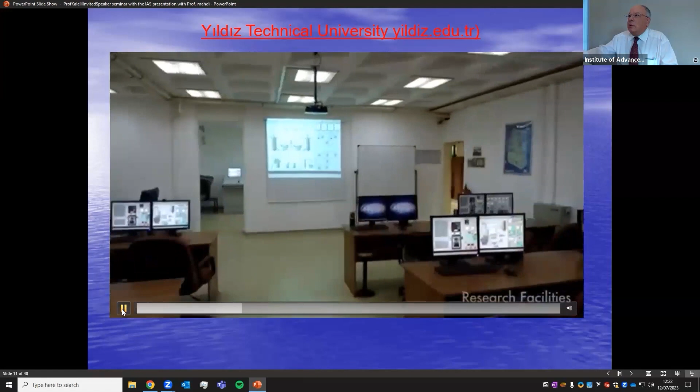I just want to tell you some small things. I think I heard that Loughborough University's campus is the biggest campus in Europe, isn't it? It's unbelievable, it's very nice. But I think, as well as a broad variety of cultural and artistic occasions, this gives students the opportunity to lead an active academic life.

Being one of the most well-known universities in Turkey, it is conducive to the achievement of the goal of development and welfare of society. Yildiz Technical University, one of our leading government institutions, is situated on 2 campuses in Istanbul. It is the 3rd oldest university in Turkey, with its history dating back.

So every year, the professors, all teachers, if they do high quality papers like Q1, Q2 in Scopus, our rector gives us an award, a certificate, and also they give some money for remuneration. It was 2 months ago, I got one.

To 1911. Today, Yildiz Technical University has 11 faculties, most of which are related to engineering, 2 graduate schools, 3 vocational schools, 1 school of foreign languages, and more than 34,000 students.

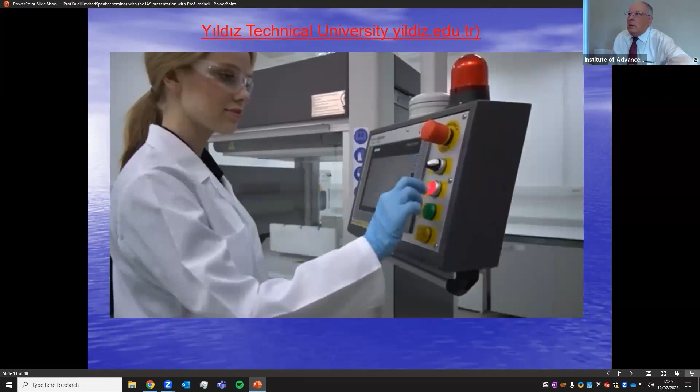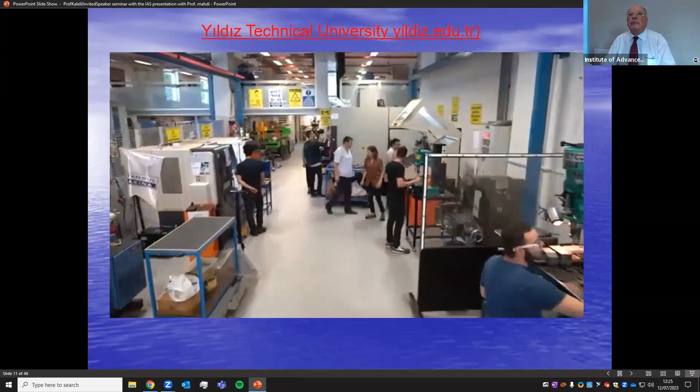Activities in our country, Yildiz Technical University commenced operations in certain technological development areas and founded Yildiz Technopark in 2003. Yildiz Technopark hosts more than 7,500 research and development companies in many sectors, such as software, information and communication technologies, electronics, the pharmaceutical industry, the machine and equipment industry, chemistry, the aviation industry, the defense industry, civil work, and the food industry.

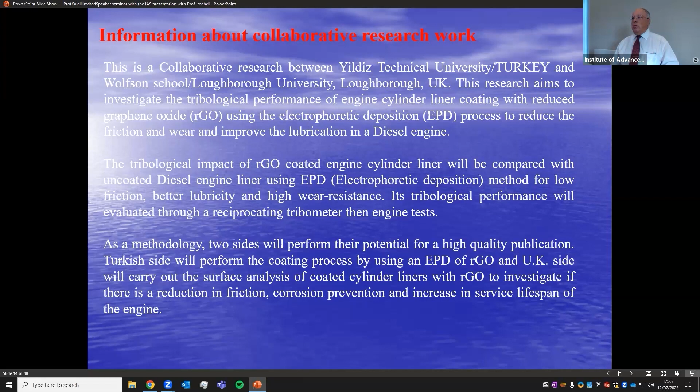As a methodology, two sides will perform their potential for high quality publication - for a good collaboration, we need to publish high quality papers. The Turkish side will perform the coating process using EPD of RGO, and also I can add multi-walled carbon nanotubes. The UK side will carry out surface analysis of coated cylinder liners with RGO to investigate if there is a reduction in friction, corrosion prevention, and increase in service lifespan of this engine.

The importance of this collaborative research work, so you know.

We have 100% of energy, and only we obtain 40% as indicated work. And 25% of this indicated work is mechanical losses. So what happens? 10% of mechanical losses, we obtain mechanical in 10% of the total energy.

According to Dr. Lang, as you see in the paper here, the friction losses comprise 72.5% of the mechanical losses. What you see here are connecting rod bearings, main bearings, pistons, valve train. The most wear mechanism occurs at top dead center, between when the piston and cylinder liner rub together.

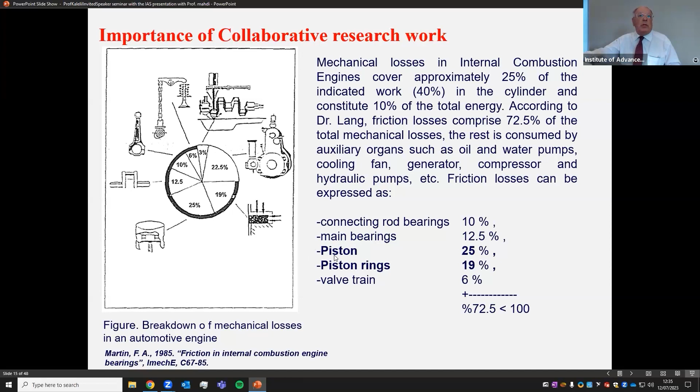You see the piston friction is 25 and piston rings is 19, so it's almost 45-50% of friction losses happening there. According to my experience, most of it happens at the top dead center of the engine.

So the importance, in terms of total energy saving in internal combustion engines, a 10% reduction in friction losses is estimated to give fuel economy between 1 and 3%. But the importance here comes from powerful collaboration. If we can coat with RGO or multi-walled carbon nanotubes as the second option, then we can collaborate.

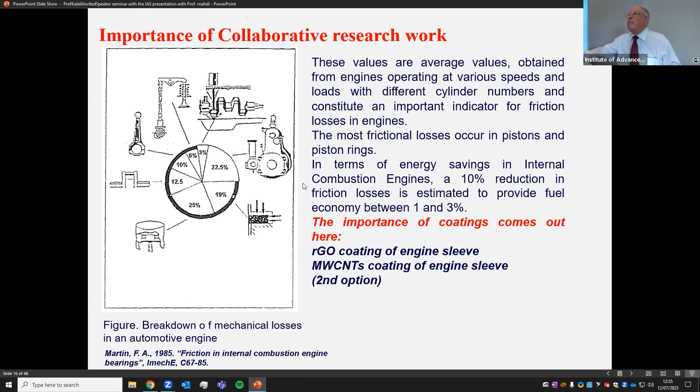In our lab, we have a single cylinder diesel engine, the 6LD400, and you see the engine specification here. It is produced by Anadolu Motor Group, a big company in Turkey, and we have this engine.

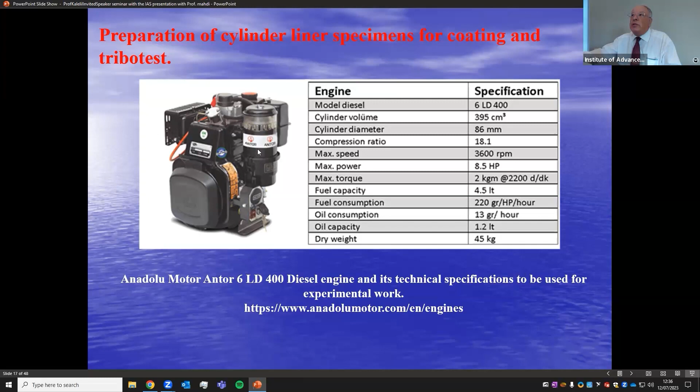So why EPD coating? Why electrophoretic deposition? Because you apply energy voltage, and the coating can be done between 1 and 5 minutes, or 10 minutes for multiple coatings. It provides a homogeneous coating surface. By extending the time, the coating thickness can be variable, and it's low cost.

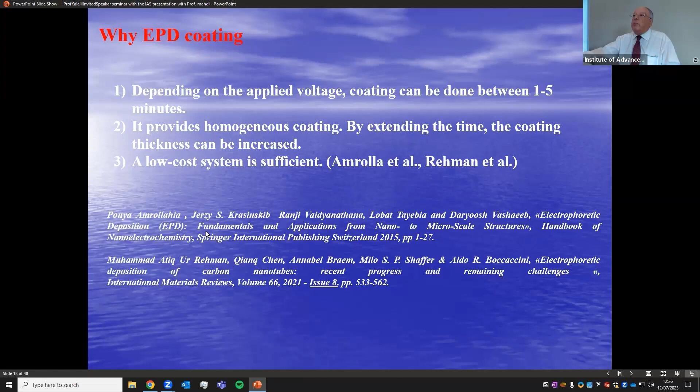This belongs to the Anadolu Engine Group in Turkey, in Istanbul. So it's a dry cylinder liner, you can change the liner, so we can have spare parts. And what we did, for tribo test,

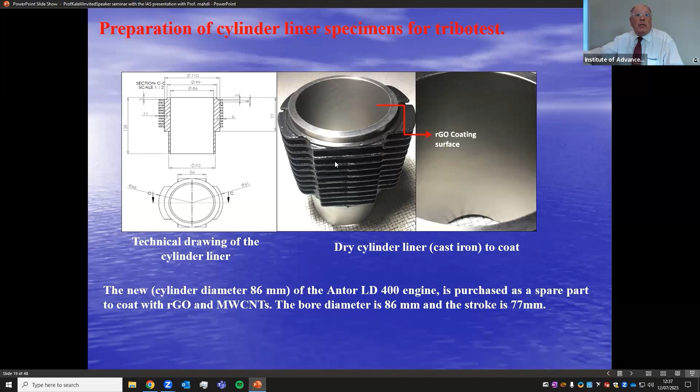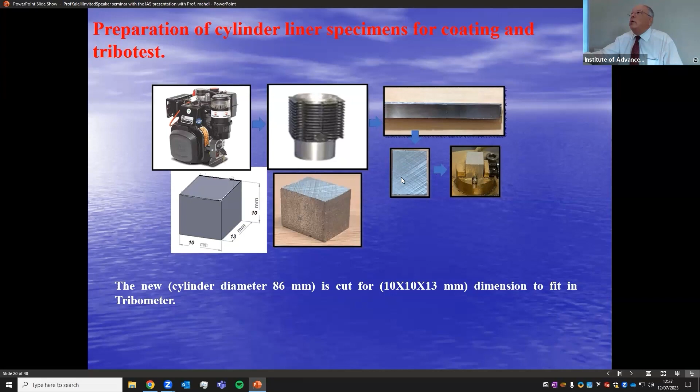We cut it without damaging the rubbing surface, the honed surface. We cut a 10x10x13 millimeter dimension to fit in the tribometer here. This is the cylinder liner surface.

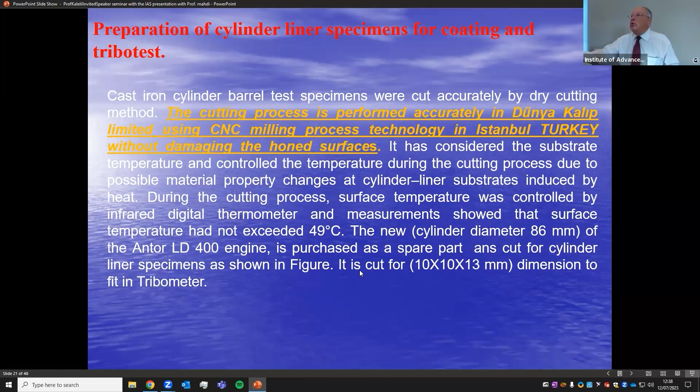For the cutting process, we collaborated with industry. I have a good collaboration with Dünya Limited in Turkey, and they used CNC milling process technology without damaging the honed surface. They measured the temperature not exceeding 49 degrees Celsius, and they cut it in a dry cutting process. They cut very well, 10x10x13 millimeter dimension, and it fits well in our tribometer.

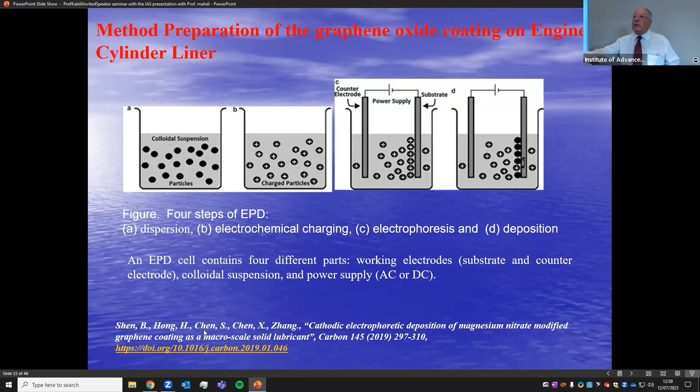For the process, we have 4 steps: dispersion, electrochemical charging - as you know, electrophoresis - and deposition. So we use this recipe from the literature here, from this paper.

So we have RGO powder, and we have isopropanol. We mix isopropanol with RGO powder. Then we add the magnesium nitrate, and we have the EPD process. Then we coat the engine cylinder liner here - I will show you later.

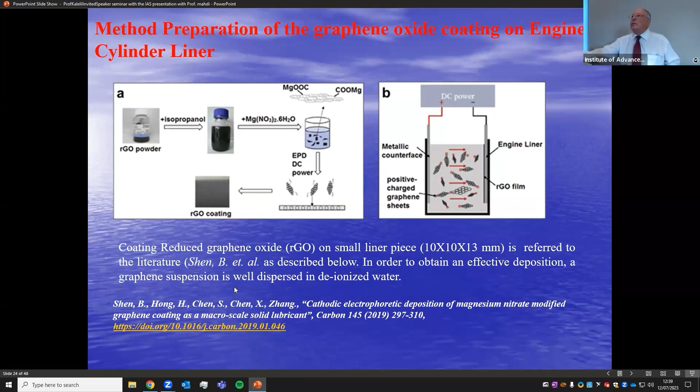First of all, we prepare graphene with isopropanol solution. The duration of magnetic hot plate stirring and ultrasonic cleaning is 1 hour, 30 minutes, 30 minutes. It should be well dispersed, well in colloidal form.

Total 30 minutes. And also, then after we add the magnesium nitrate - we know the amounts according to the recipe from literature survey - and the mixture of graphene isopropanol is mixed with magnesium nitrate here, still on the magnetic hot plate, also in the ultrasonic cleaner. So stirrer and ultrasonic cleaner with magnetic stirrer.

The thing is, the solution here is getting hot. If it gets hot, you cannot proceed with the EPD process. That's why we use ice to keep the solution cold. That is very important.

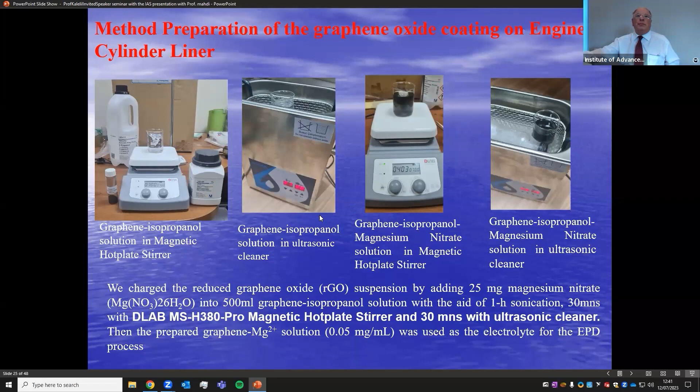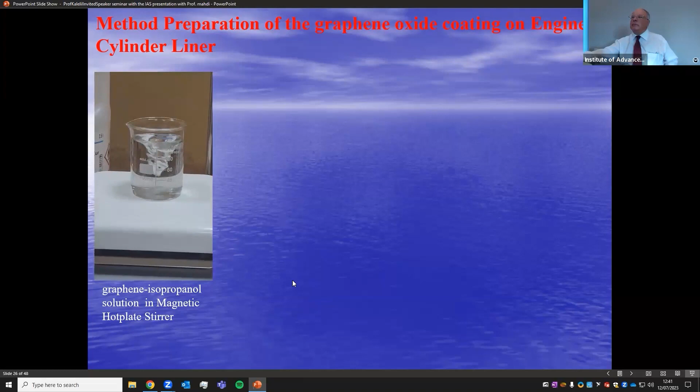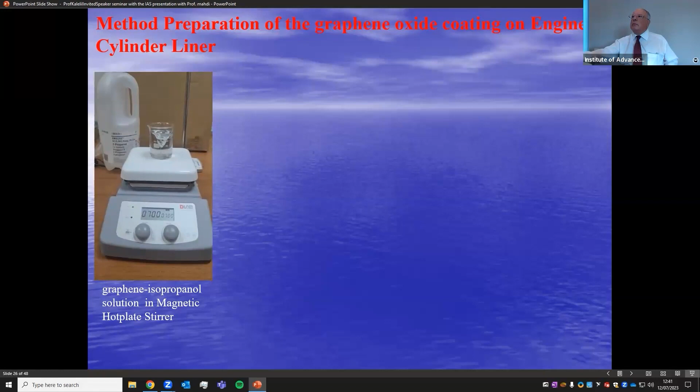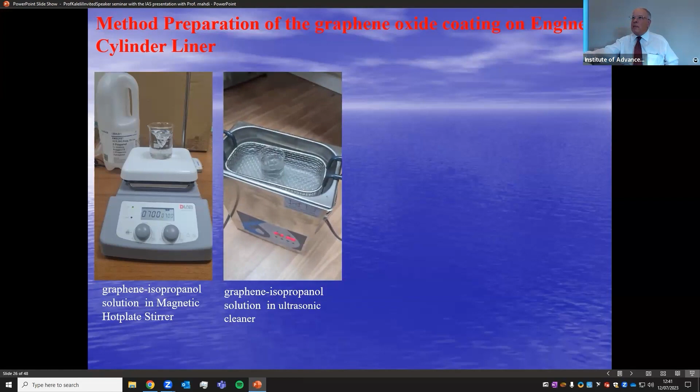Then ultrasonic cleaner. Magnetic stirrer and ultrasonic cleaner is very important. If you don't do it, you cannot succeed. It's very difficult.

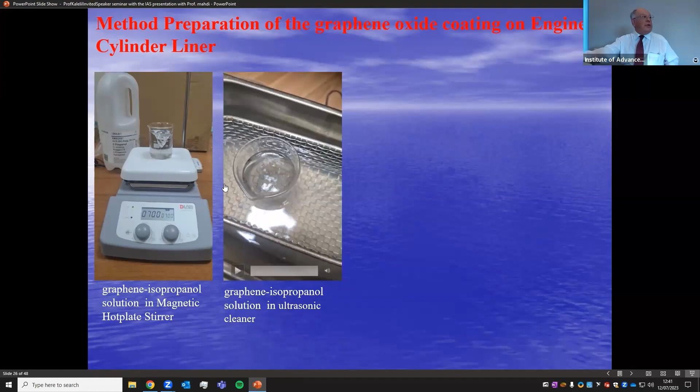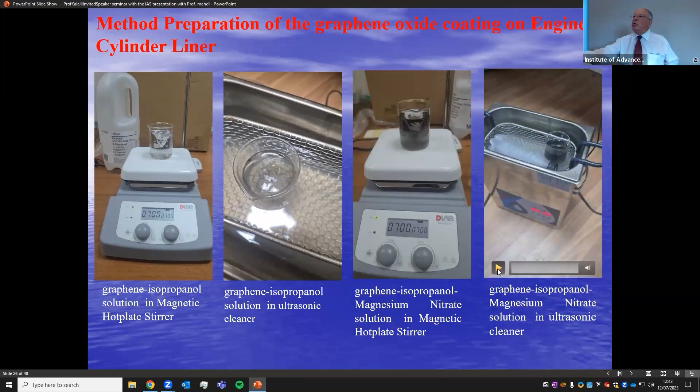Then we added, according to the literature survey, magnesium nitrate, enough amount. You see the color starts to change. Then magnetic stirrer 30 minutes again. So this total is 1 hour, so 2 hours.

So we need ice here. It's getting hot.

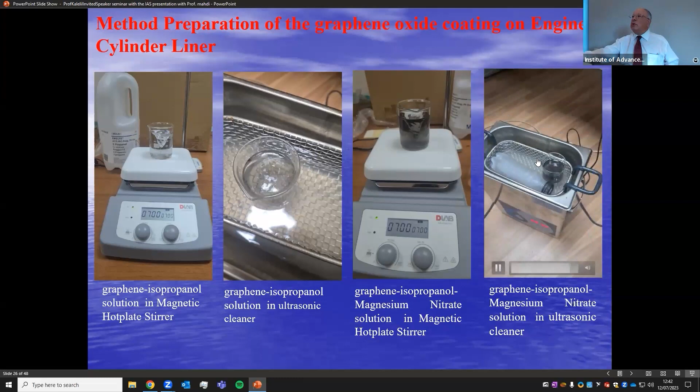For this process, you can have power supply. There are different kinds of power supply, like for example 30 volts, 40 volts, and it is not enough. Because the metal we use is cast iron of the engine liner, and 30 volts is not enough. So we had to buy a Consort EV from Belgium, which can go up to 1,200 volts.

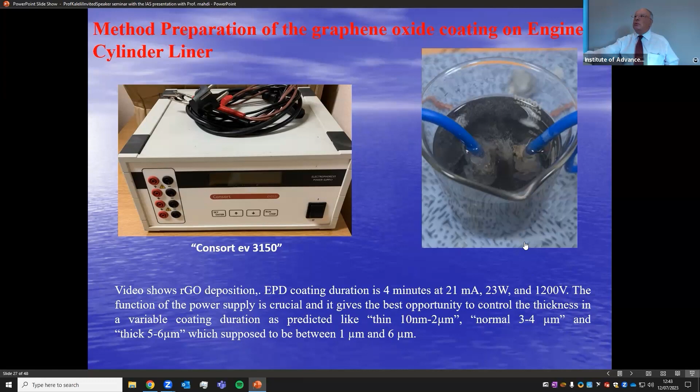Some voltage in our lab was variable. So for example, in this process we used 4 minutes, 21 milliampere, 23 watt, and 1,200 volts. So you can see here.

You see the coating process, and to be able to coat, we just isolated the pieces of lining. If you see bubbles at 1,200 volts, then you understand you will be successful.

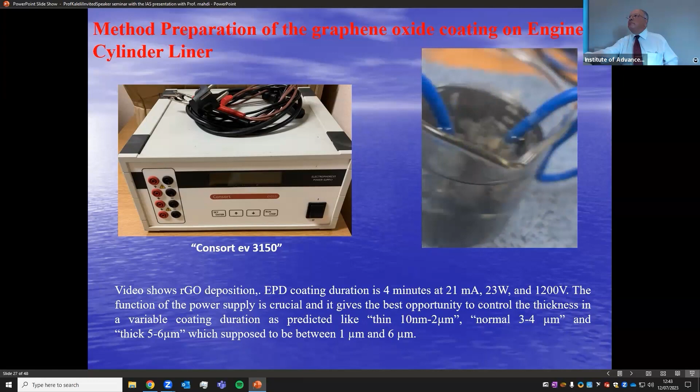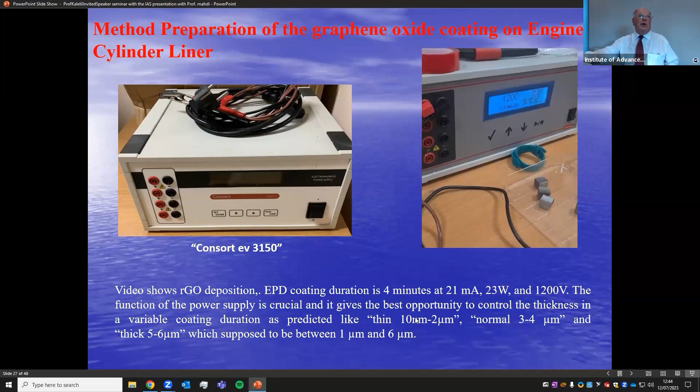Just let me show you, we coated some, but we will continue our collaboration to obtain, for example, different thicknesses from nanometer to micrometer. It can go up to 6 micrometers.

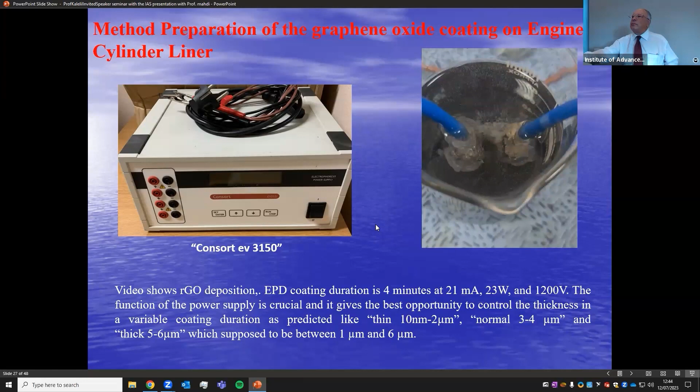You see, 1,200 volts. Different thicknesses, different shapes.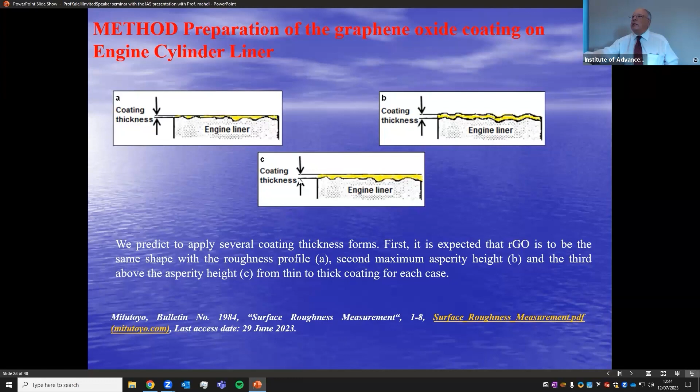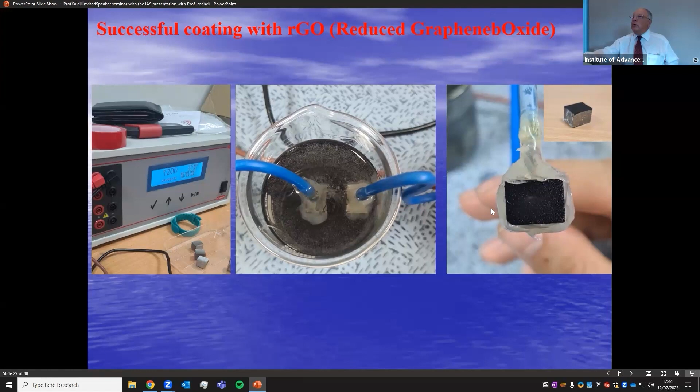And so at the end, we obtained reduced graphene oxide coating on the engine liner. You take off the isolation of silicone, and you can test it on the tribometer.

Well, here you see the coating of 3 minutes, 4 minutes. And we have also 6 minutes and 2 minutes. We have more.

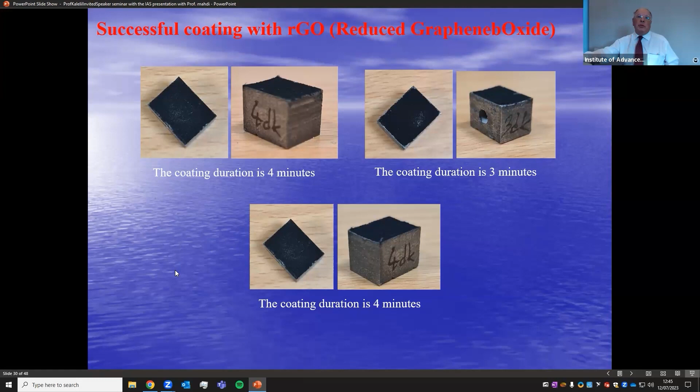So my tribometer is a custom-made tribometer. It's very sophisticated. It can have 800 data points per second.

The heating goes up to, here we use the procedure, 99 degrees Celsius with 30 Newton and 21 minutes. Why 21 minutes?

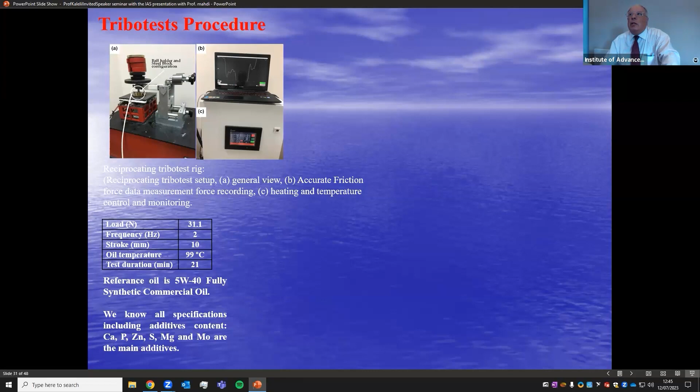Because when I speak French, I have been in France, Lyon, at INSA many years ago, and I worked with Mr. Yves Berthier at INSA Institute. As I speak French, we collaborated together, and we tested on the tribometer at INSA.

These parameters. Why these parameters? Because we like to obtain additive layers, just covering all the surface on the liner or on the sample we are working with. That's why I use this procedure for this type of lubrication condition.

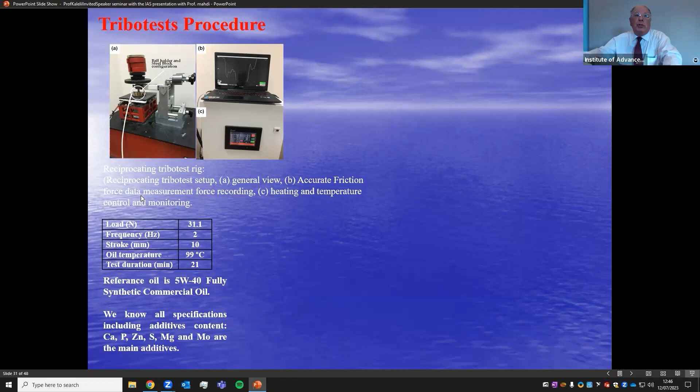And if you exceed more than 21 minutes, 30 minutes, the friction becomes steady. So we stop there to see what happens on the surface.

We used mostly, we had used real piston rings on the liner before, but it doesn't work because of the holder. We cut small pieces of the piston rings, and if you set it up with 1 micron or 2 microns, the results are all different, and also the shape of the piston rings varies, there are different types.

They are changing. So we produced a specially made ball holder and ball with 8 millimeters. Just to obtain a contact point, and in that tribometer we tested different kinds of lubricants, nano lubricants, nano additives, etc.

That's why we use a ball on block system. And you see the cylinder liner here, 10 and 13 millimeters, as we cut it in the industry.

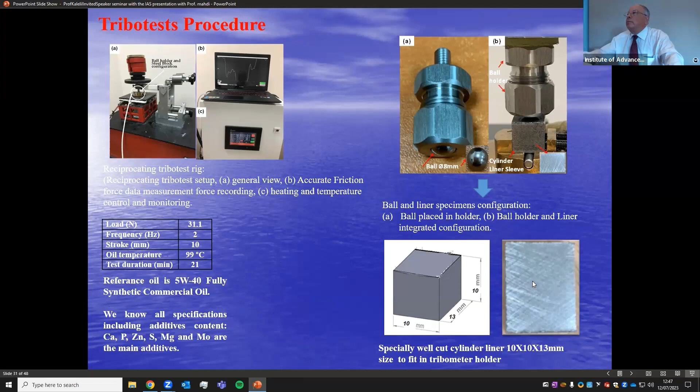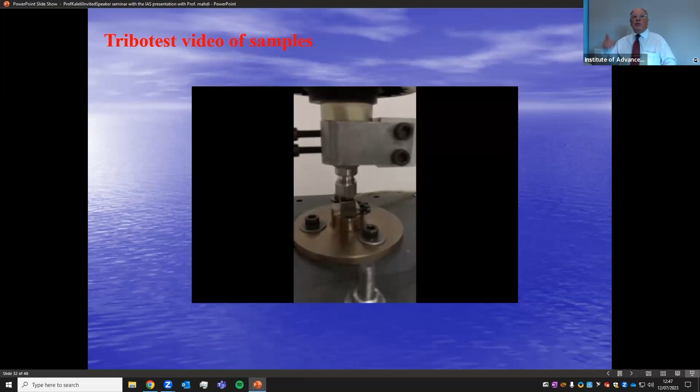But I will show you just a small example of my tribometer. It's very sophisticated, and we did the program also.

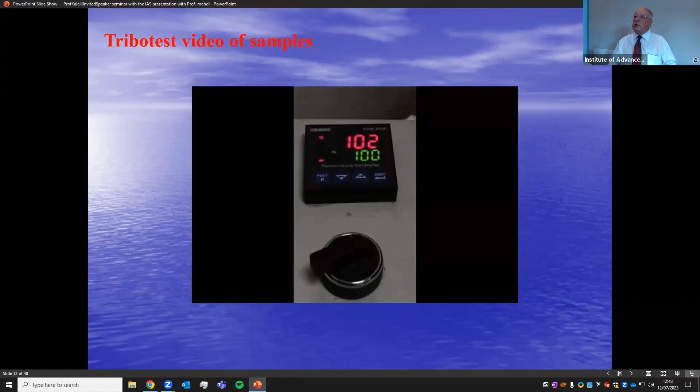The temperature is 100 degrees Celsius, and you will see the signals going up and down, so you know, reciprocating, and we obtain 800 data points per second. And in that case, 640, because the stroke is 8 millimeters.

So next step, this was for reduced graphene oxide. Now also we tried, surprisingly, this is also a PhD thesis of my student. He's working very hard, he is good. We tried also with multiwall carbon nanotubes.

Just before coming here a month ago, we started almost 2 months ago. So we bought multiwall carbon nanotubes from Arkema, and you see the specification. But for this the solution is different.

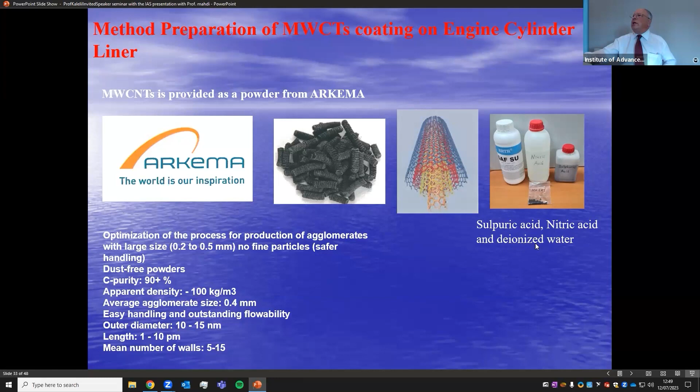We found the recipe, the article, and we need sulfuric acid, nitric acid, and deionized water. Then you can do coating with those. So the preparation is just first of all mixing the nitric acid, sulfuric acid mixture.

Then adding carbon into that mixture, and stirring with a magnetic stirrer at 130 degrees Celsius for 30 minutes. So you obtain one solution. Then after, you add very small drops of this solution into deionized water. Then you can do the EPD process.

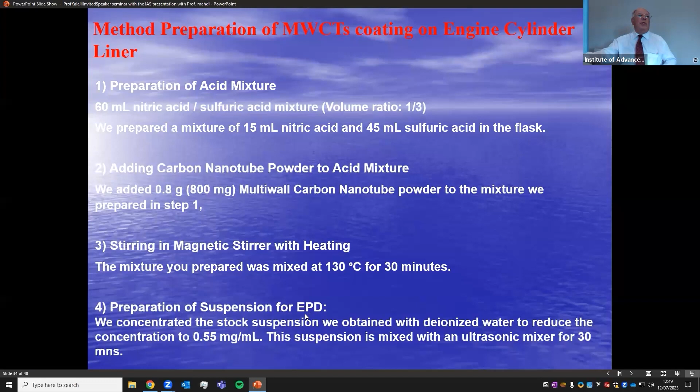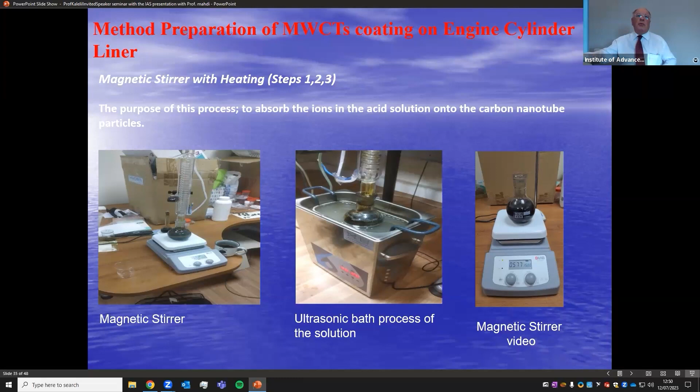So you see, this is a magnetic stirrer, and after the ultrasonic bath process, we use the magnetic stirrer. This is the first solution with sulfuric acid, nitric acid, and multiwall carbon. So you obtain this heavy solution.

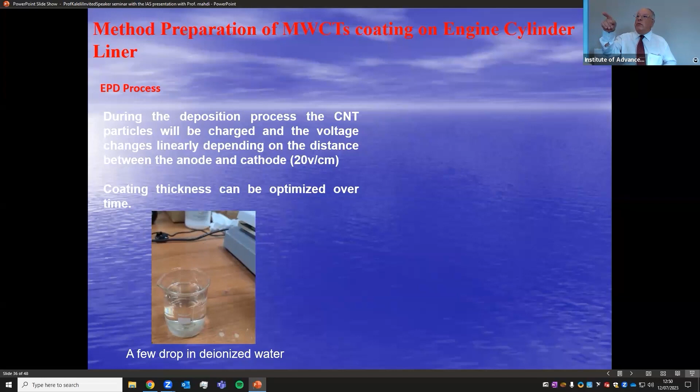You must use a few drops of this solution in deionized water, but we only use one drop here. If you increase the drops, it doesn't work. So after many experiments, we have succeeded.

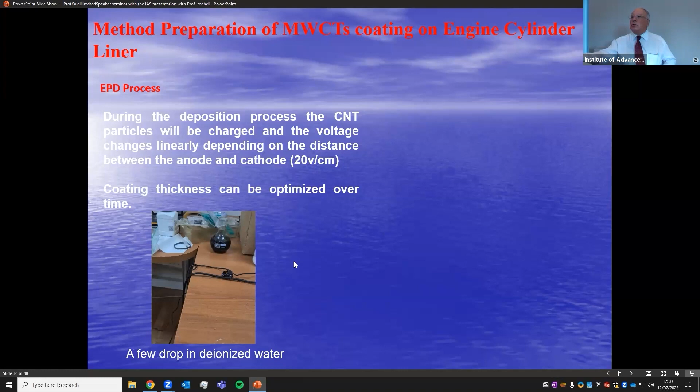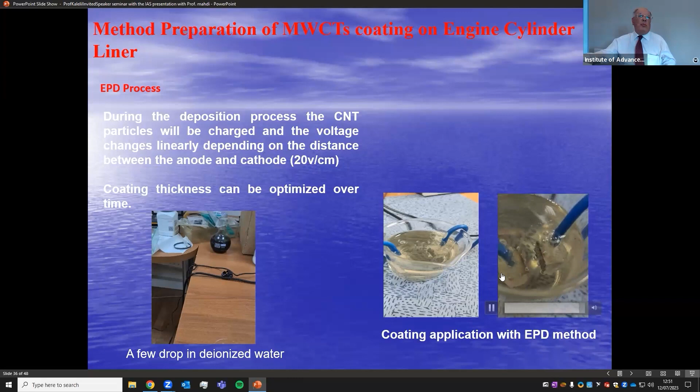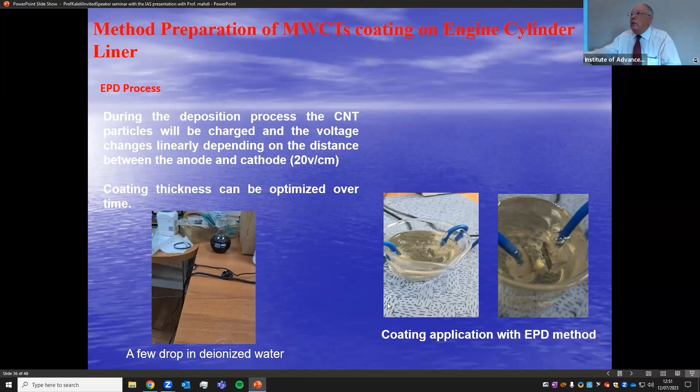The voltage at that time is 40 volts, and the distance is 1 or 2 centimeters, no more. For example, if we tried 3 centimeters, it didn't work. We did many tests and spent a lot of samples. We lost some, but we obtained results.

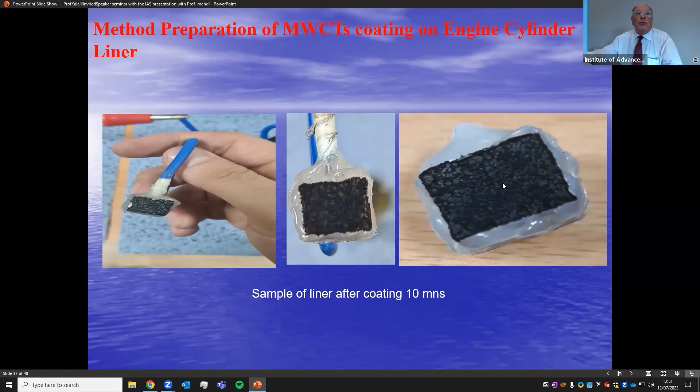So you see the multiwall carbon nanotube coated surface. Then it's ready for the tribometer. Just before coming here, we did

some tribo test results. In my tribometer, we have a very nice program. As it is reciprocating, it takes the average of all data. We have millions of data points here, as in 1 second is 800 data points. And it gives us the average of the COF and also the shape.

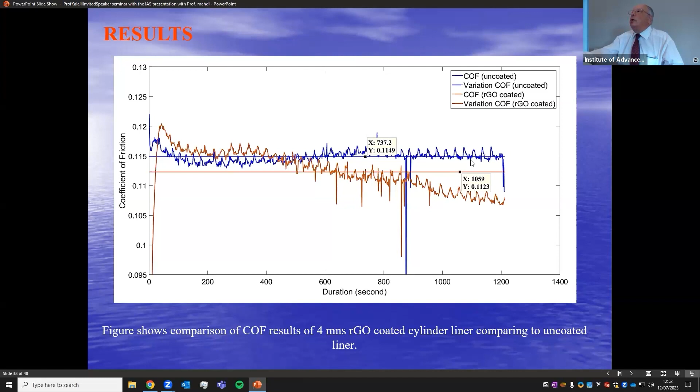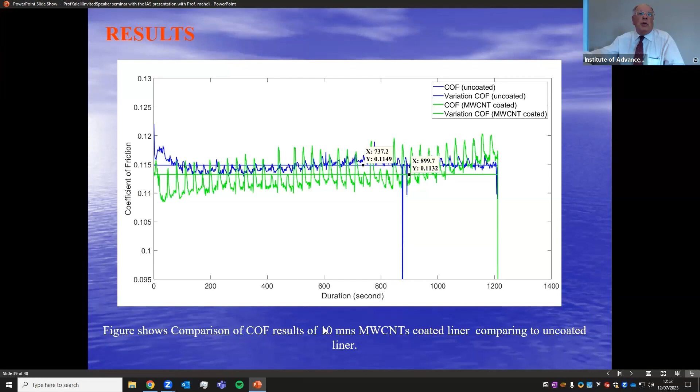You see here the red one is RGO and the other one is uncoated. And here you see the multiwall carbon nanotube sample also, and multiwall carbon nanotube was less than the uncoated one. But the multiple coating took 10 minutes, 9 to 10 minutes. It was not 3 or 4 minutes - you cannot succeed in that time.

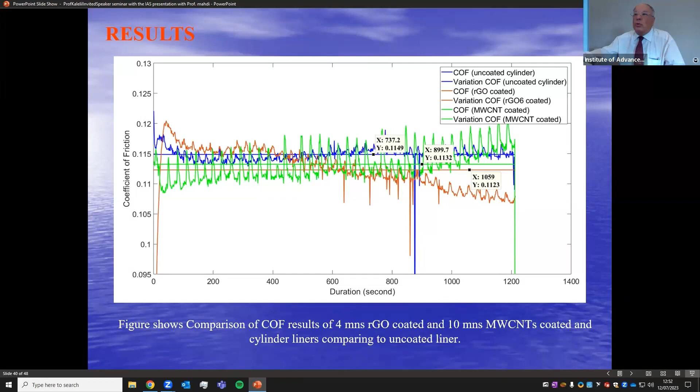So this is uncoated, multiple coated, and RGO coated. As a coefficient of friction, you see the result here. So uncoated was this one, and it improves up to RGO. So RGO is much better than multiple coated.

So the COF is decreased by 2.26% for RGO and 1.47% for multiwall carbon. The error data is 0.1, not 1 - 0.1%. So almost 1 by 1,000.

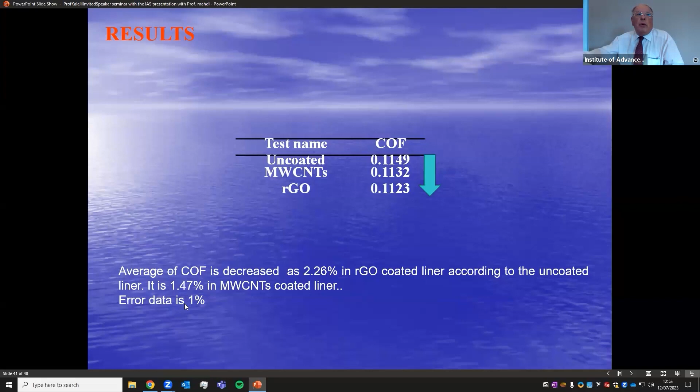Next step will be engine test, if we can collaborate, I hope. For the engine test, we designed a special device just to install the cylinder liner, cylinder sleeve in that procedure, and we obtained it. We did.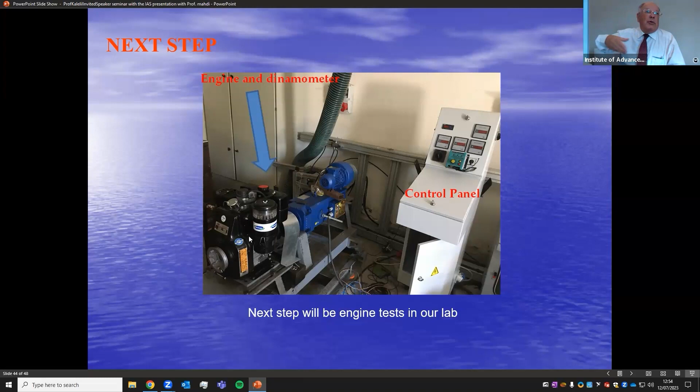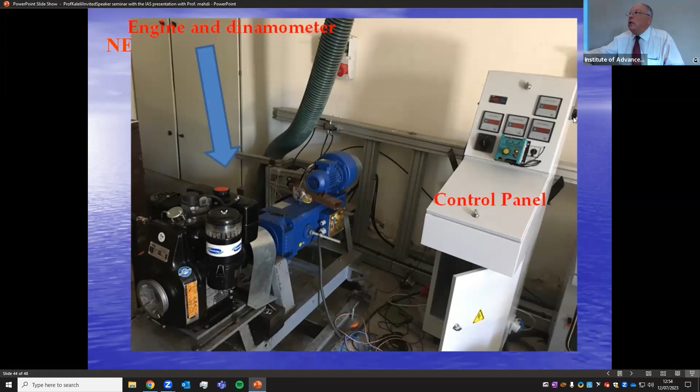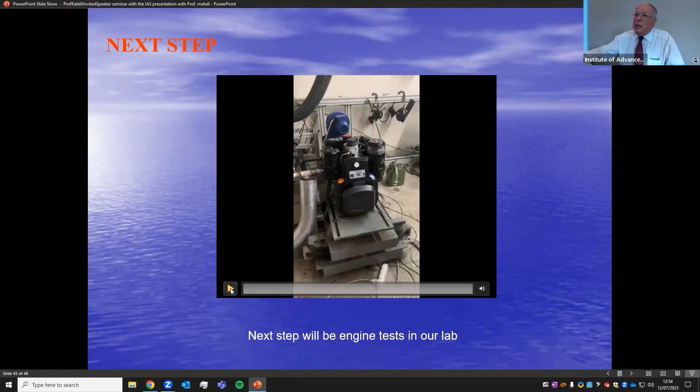And for engine test, we can do engine performance test, and engine life test, like power and torque. We can obtain all data in that device, in that control panel. We can control it. So I would like to show you on my presentation, our engine working.

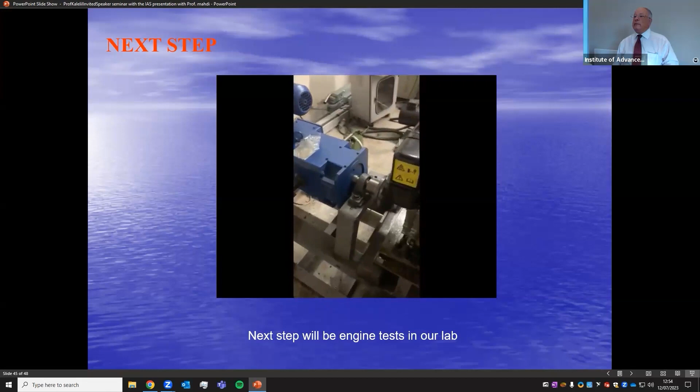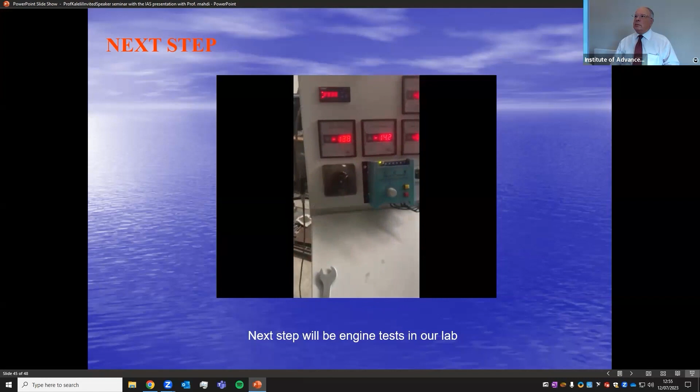We have all information for when we are doing engine performance test. We can draw torque and power according to the revolution.

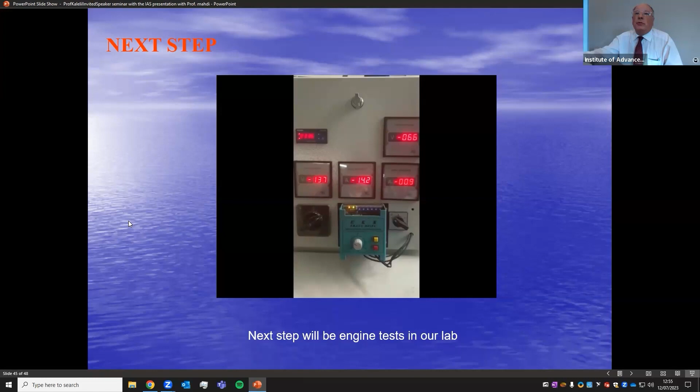So added value of collaboration with the UK side - what we are thinking is the high potential with two fort universities. The UK side will carry out surface analysis of coated liners, cylinder liners with rGO, I hope. So I have samples, I got samples with me, and we can continue our collaboration.

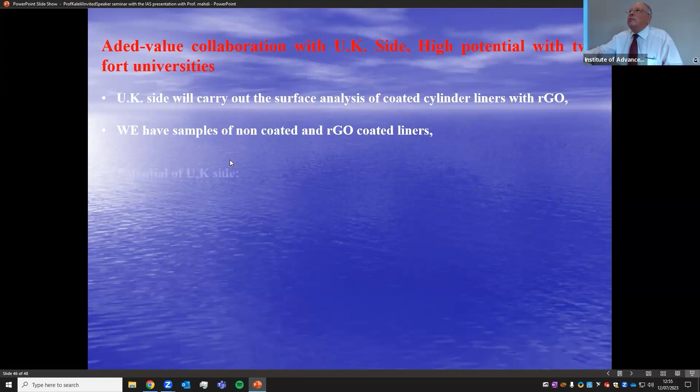I can leave them here, or we can start as much as you like, whenever you like. I have non-coated and coated samples. Even just a small introduction here - we polished the honed surface also, because the coating can be done better depending on the honed surface, as the machining marks make it a bit difficult. We succeeded, but I also have non-coated samples just to start.

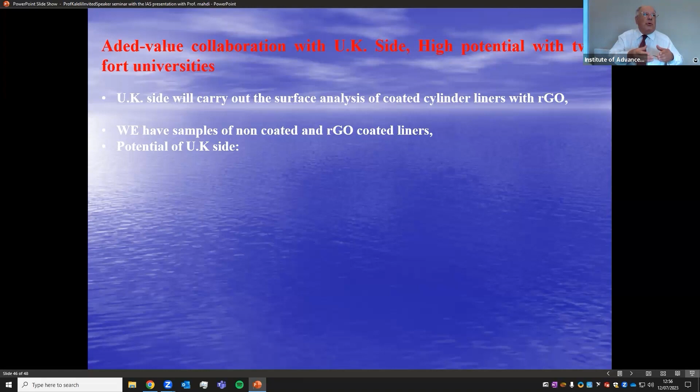So your potential is here. First of all, I would like to ask if it is possible - coating thickness is important for us to see with my samples, what about the coating thickness? If we learn the coating thickness according to the coating time, then we can progress better.

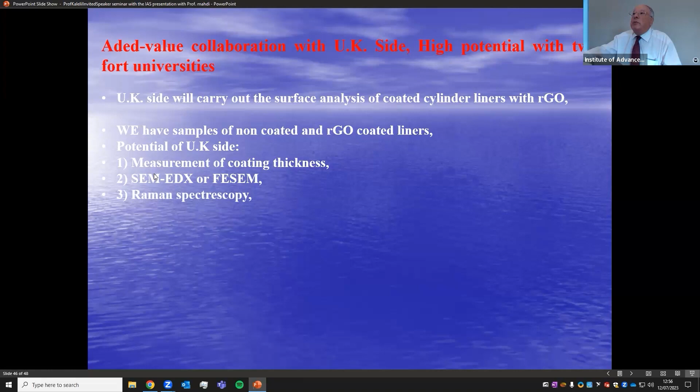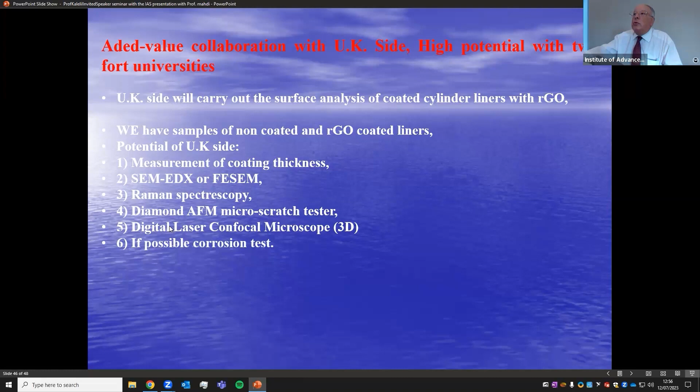And SEM EDX or FESEM, Raman spectroscopy, AFM, and laser confocal for surface roughness. And if it's possible, corrosion test. We need to measure, of course, wear resistance - it's important.